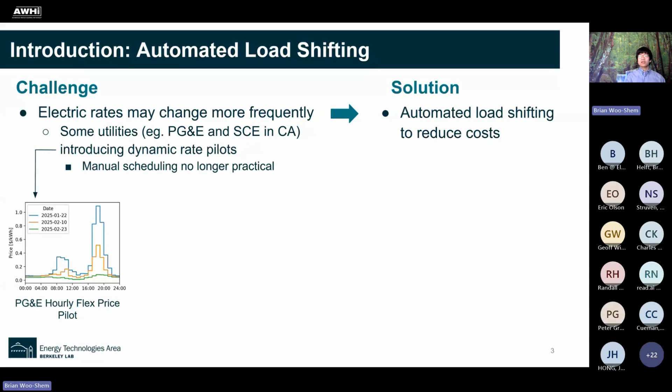In the future, electricity rates may become more dynamic, changing hourly or even more frequently. Some utility companies are introducing hourly flex price pilot programs with prices that vary each day, such as these from PG&E's program. With dynamic pricing, optimizing schedules manually for devices becomes much less practical, and our solution is to have automated load shifting to minimize costs. The goal of our work at Lawrence Berkeley National Lab is to develop an adaptable algorithm that can determine a near optimal schedule from the prices and a few measurable or calculated site parameters.

Highly dynamic pricing reflects the cost to supply electricity at a given time. For part of this field test, we use an example typical day, highly dynamic price for winter and summer, where unfortunately it's the same price every day, but it's still a dynamic price in the sense that it has that kind of shape, shown in the red and blue lines here. We also tested real highly dynamic prices from the PG&E Flex Price pilot program.

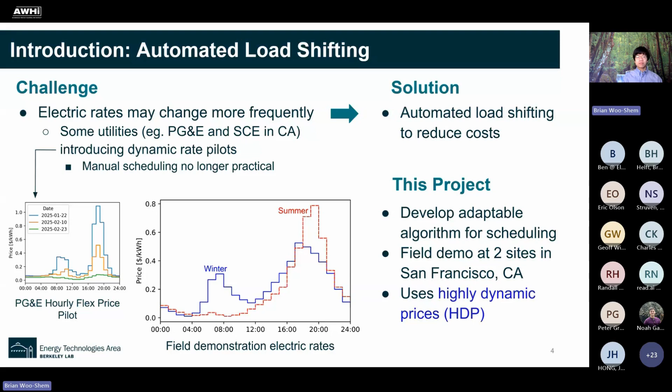So California has set a target to have 7 gigawatts of load flexibility by 2030, with the goal of improving grid reliability and resiliency while making electricity more affordable by reducing the costs during peak load times. This project is funded by the California Energy Commission's Electric Program Investment Charge through CalFlex Hub, a program of studies to identify, evaluate, develop, and demonstrate demand flexibility technologies that are not yet on the market, and help the state meet our 7 gigawatts goal.

The overall CalFlex Hub portfolio includes 90 test sites with projects in HVAC, EV charging, battery energy storage, thermal energy storage, smart thermostats, smart panels, home energy management systems, pool pumps, heat pump water heaters, and heat pumps across single, multifamily, residential, commercial, and campus projects.

The EasyShift algorithm used in this study was initially created under the Stor4Build project, a multi-lab collaboration to develop and deploy thermal energy storage. EasyShift was originally created for hydronic heating systems with air-to-water heat pumps, but was designed to be intuitive and adaptable to any system with energy storage. Since the tanks in central heat pump water heater systems provide thermal storage, we adapted and validated EasyShift for this application.

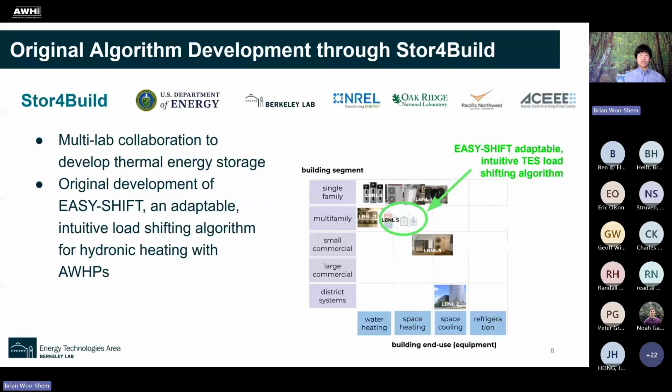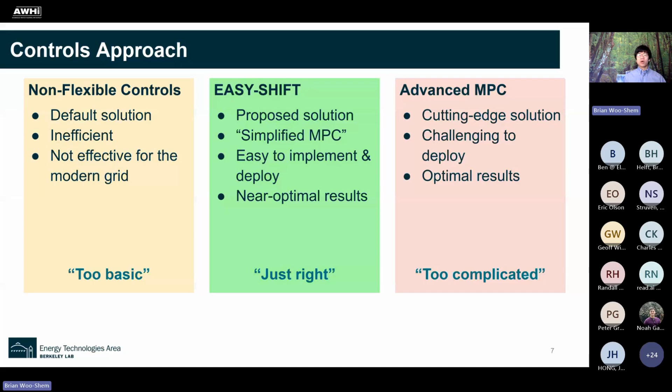The approach for providing load shifting attempts to find the ideal balance between non-flexible controls that are currently present in most devices and are only able to satisfy demand and equipment constraints, and then our most advanced controls, such as model predictive control, that can provide optimal results but have limited adoption because they're just more challenging and expensive to deploy. So this project leverages EasyShift, a simplified MPC, or it could be considered an advanced rule-based algorithm, designed to be simple to deploy while providing near optimal results.

And for this project specifically, as electricity costs have increased, building managers who retrofit buildings to have central heat pump water heaters are not consistently seeing savings on their energy bills. So the goal is to see if we can use the load shifting controls for central heat pump water heaters to help bring those costs down.

The performance of the algorithm was demonstrated through field testing at 2 affordable senior housing sites in San Francisco, California. These are operated by the Tenderloin Neighborhood Development Corporation. They have graciously allowed us to run tests on their equipment and encourage our work to reduce operating costs for the properties, which they can reinvest to better serve their tenants. This presentation will focus on results from the larger site where we have done the most testing.

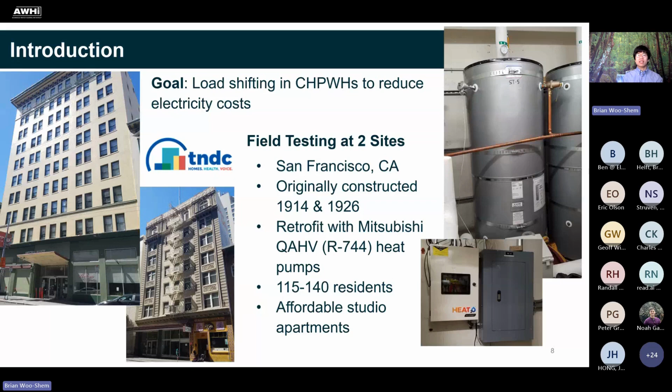Some of you may be familiar with this, but I'll go through a little bit of how these systems work. So the central heat pump water heater systems have 2 heat pumps that provide hot water to a series of tanks. The storage tanks may hold hot or cold water, and we can adjust the state of charge by changing the ratio of hot water and cold water. So the storage tanks feed into the swing tank, which goes to a thermostatic mixing valve and delivers hot water to the occupants. Recirculation then returns back into the swing tank.

When we want to run the system and maximize storage, load up mode activates the heat pumps to increase the amount of stored hot water, and then to avoid using energy during a period, bottom image, the system stages the heat pumps such that only one runs at a time generally, and it allows the amount of hot water to decrease to a minimum level and prevents the swing tank from running.

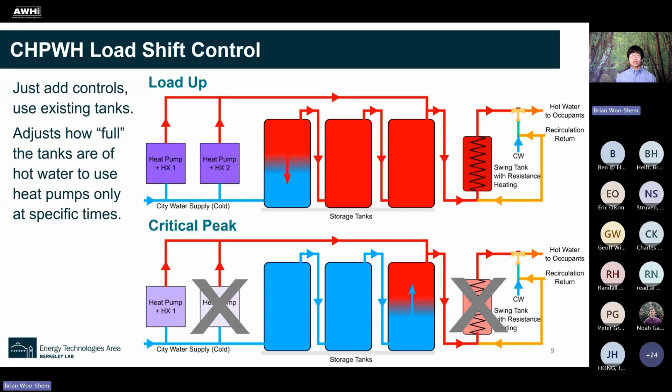Shed is a mild energy saving mode that sets the tanks to a low state of charge, but keeps the heat pumps and swing tank active when needed, which ensures there will be hot water. Normal mode is the typical operation, which has a large deadband for heat pump operation cycles that are many hours long, and load up mode charges the tanks by running the heat pumps as much as possible.

Hey, Brian, quick clarifying question. Jackson asked, what is the total capacity of the tanks in gallons? I'd have to check, but I think it's on the order of 1,000 gallons. I could look that up afterwards. Awesome. Yeah, that sounds right for a central system. Sweet. Thank you.

Of course. So the difference between shed and critical peak modes is that critical peak cannot be used at certain times without sending cold water to the building. So I'll try to explain how that works. So assuming that you have relatively high domestic hot water draw, the swing tank will stay warm because there's higher temperature water flowing in from the heat pumps and storage tanks into the swing tank as water is removed from the recirculation loop. So under these conditions, critical peak can be used and the swing tank can be disabled.

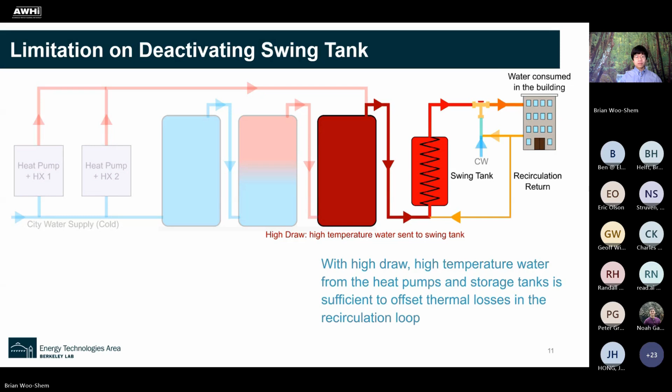However, if your domestic hot water draw is too low, very little water enters the swing tank from the heat pumps and storage tanks, so the same loop of water is just circulating between the swing tank and recirculation loop. And then over time, the thermal loss in the building recirculation will cause this water to cool, and if the swing tank resistance heating is not active, the occupants get cold water.

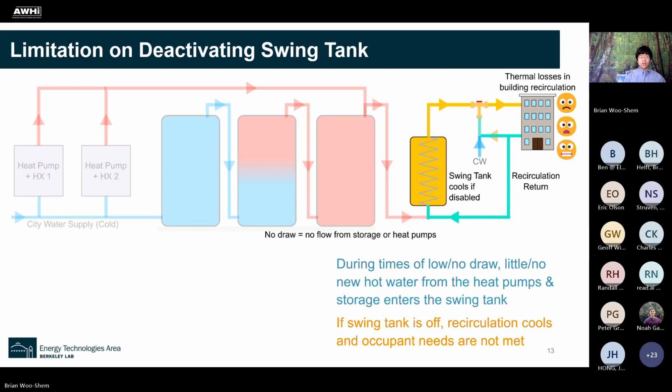When we do not run any load shifting, the system is in normal mode all the time by default. So the large deadband range causes the heat pumps to typically have a single long operating cycle, and the system typically starts the morning with a high state of charge, and then as occupants use hot water, the state of charge decreases. Around early afternoon, the amount of hot water decreases enough to hit the deadband, and the heat pumps activate, and then they stay on through the entire evening peak consumption period and into the night until the tank state of charge is at the upper deadband.

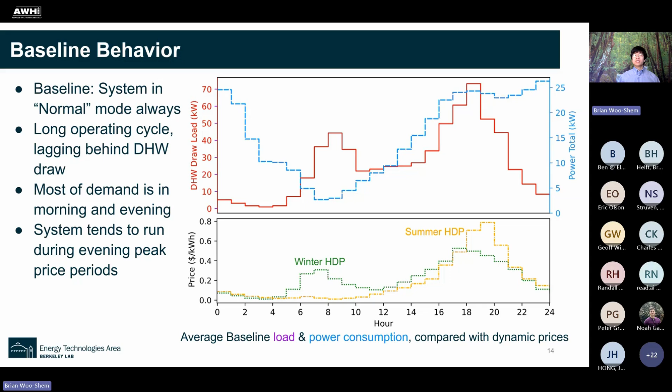So this pattern of lagging behind the domestic hot water draw, especially in an evening peaking building, and running all at once, is really not ideal under California electricity pricing, where the peak demand on the grid and peak prices occur in the late afternoon and evening, which incidentally is when these heat pumps typically end up running the most.

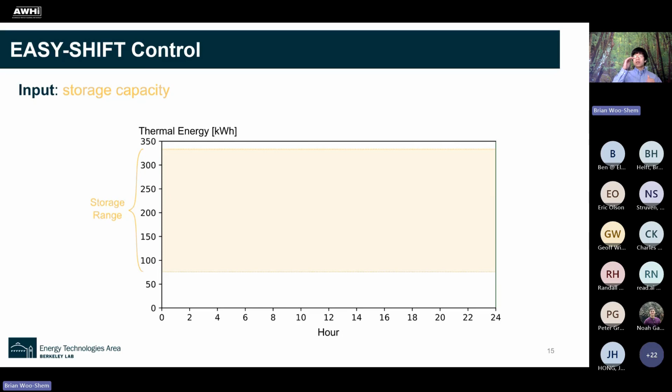So now I will walk through how the EasyShift algorithm that we've developed optimizes the heat pump operation. So we need several inputs. First is storage capacity. That's just a constant system parameter based on tank size and temperature sensor locations. So it's essentially the range of most hot water versus least hot water that we can put in there. Then we look at the heat pump maximum output and domestic hot water load or draw. This is a recent average based on data collected at the site and then converted to kilowatt hours.

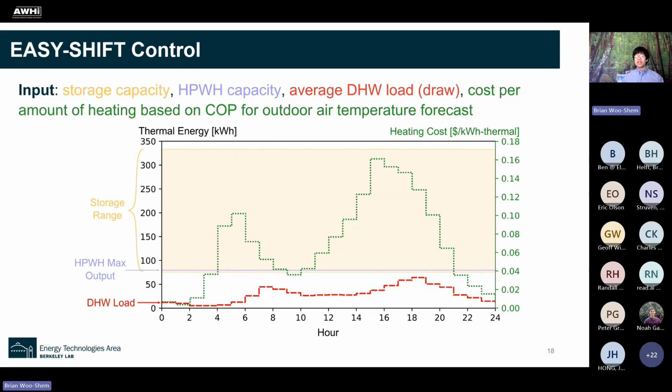We then need the hourly electricity prices at the site and weather forecasts for outdoor air temperature, which is used to predict coefficient of performance based either on manufacturer specifications or, when possible, a model based on the historical data from the site. So these two items are combined to get the cost to heat the water during each hour. So the green line represents the cost to produce 1 kilowatt hour of heat or thermal energy in a given hour.

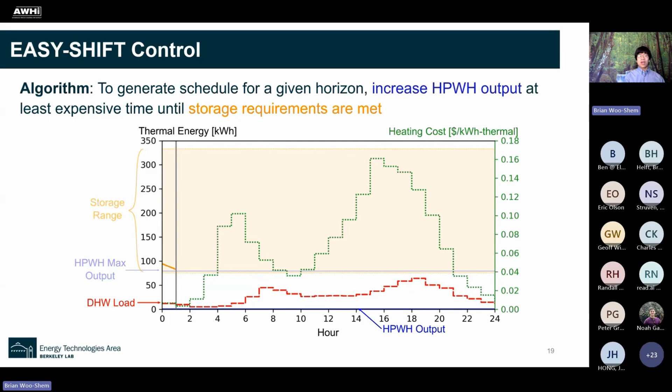So to create a schedule for the next 24 hours, EasyShift looks forward through each hour, increasing the heat pump water heater operation at the least expensive remaining time until the target thermal energy storage is within the allowable ranges, both the maximum and minimum, for the entire period, and it satisfies the hot water load for the entire time. Note, I'll emphasize that this image is generating a schedule for a given horizon. This is still happening all at hour 0. It is looking forward based on these predictions to create the schedule. And then at the end, this is the schedule that it produces.

A few things to notice, in hours 10 through 12 here, it's obeying the maximum storage limit by only limiting how much it can run. And then in hours 19 through 23, it avoids running out of hot water by using just the minimum energy needed to satisfy the load, but does not use any more since it determines it is not cost effective to run during that time unless it has to.

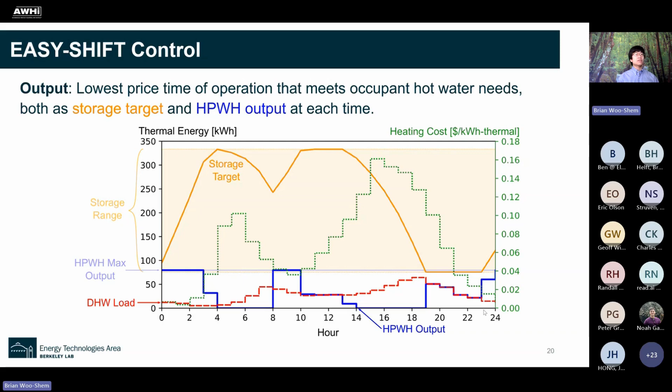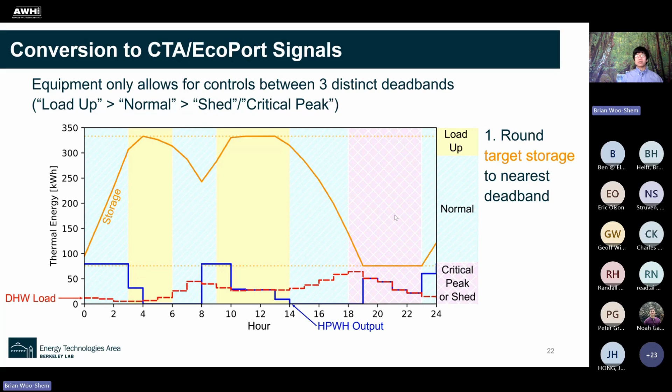So then once we have this target storage level and heat pump water heater operation, we need to convert that to EcoPort signals, at least for this field test. So first we look at the range of thermal energy to be expected for each mode, and it's essentially which deadband range corresponds to that amount of thermal energy storage. And we can simply assign each hour to the mode that matches the target storage for the end of that hour, because that's what we want it to do during that hour. So we want to set it to that mode.

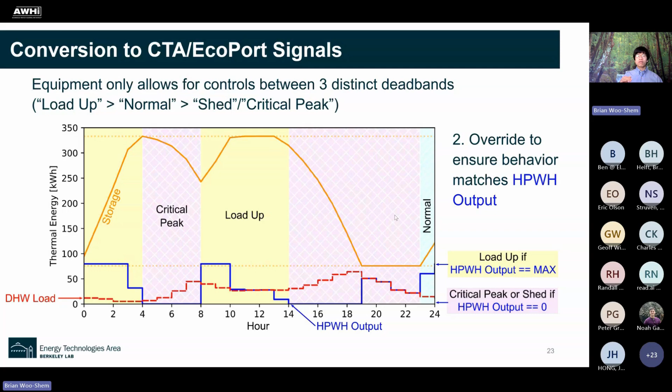Then we adjust to make sure that it matches the expected heat pump behavior, because when the heat pump is operating at max capacity, we want to force the mode to load up regardless of what state of charge it should be in. And then if the heat pump is supposed to be off, the mode should be either critical peak or shed.

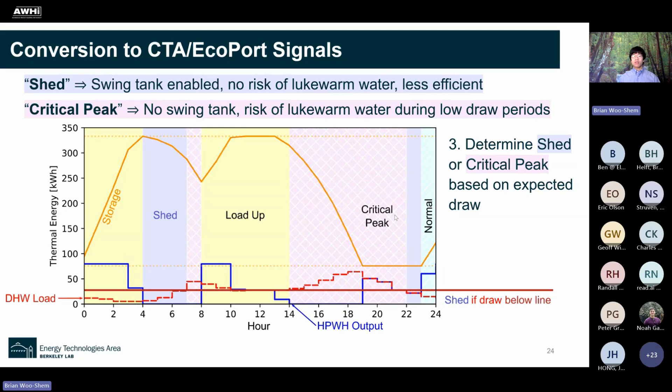Next, to determine whether to use shed or critical peak, we look at the expected draw. And previous testing found that when the draw is relatively low, recirculation losses dominate and the swing tank needs to operate where the temperature drops below set point, as I kind of showed in a diagram before. And so the dark red line indicates the threshold for high versus low draw and was determined experimentally for the site. We use shed mode, which is less efficient, but allows for the swing tank usage to prevent issues when the draw is below that line. And then critical peak, which is more efficient when the draw is high.

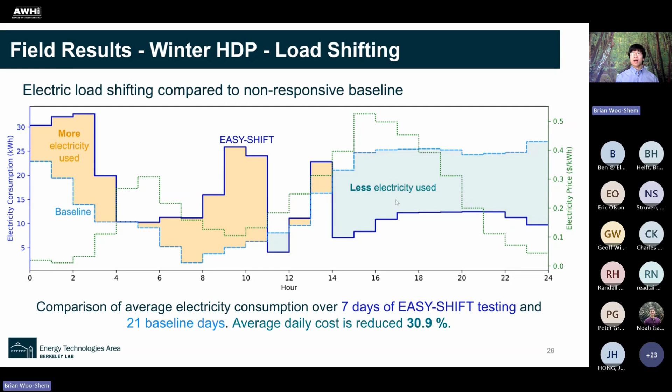And we see that under this winter pricing scenario, the total draw was similar, and EASY-SHIFT reduced the cost by about 31%. It increased the system COP slightly, and it maintained the proper set point nearly all of the time. The temperature dropped very briefly during low draw periods under critical peak in the first couple of days of the test, which is why this reliability is not 100%. So we increased the minimum draw threshold even higher between the critical peak and shed modes to prevent issues. And then we had perfect reliability after that point.

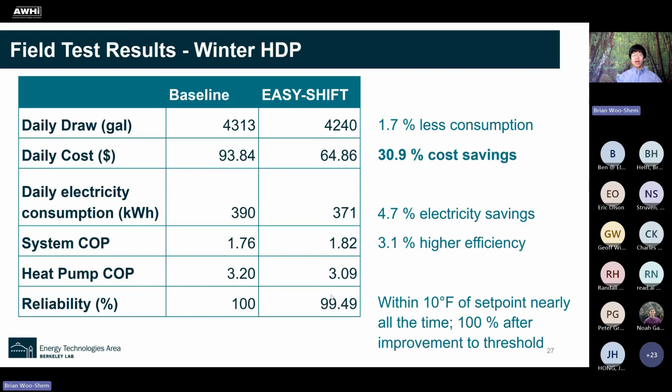We then tested a summer highly dynamic price, which is characterized by a single large peak price in the late afternoon and evening. So the algorithm responds by using load up starting at the low price in the relatively early morning, and then continuing to keep the state at a high state of charge through the afternoon. And then it uses the storage to avoid the highest prices and keeps the tank at the lower state of charge through the night.

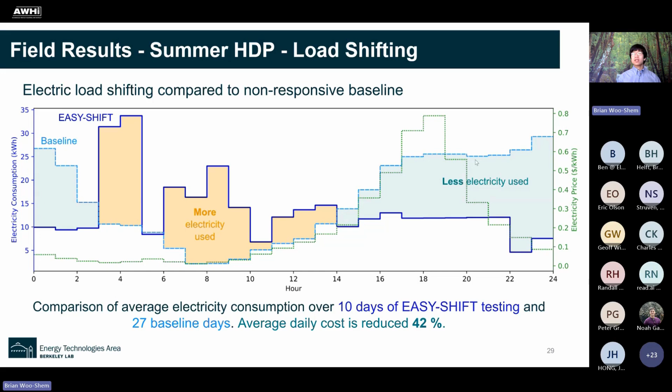And this plot here, similar to the other one, compares the average electricity consumption between EASY-SHIFT and the baseline weeks, but for the summer pricing profile. And again, yellow-orange indicates more energy used, and teal indicates less electricity used. Overall, this test reduced the cost by 42% and increased the efficiency slightly by running the heat pumps during the late morning and early afternoon when heat pump COP is higher. We're seeing good reliability here as well.

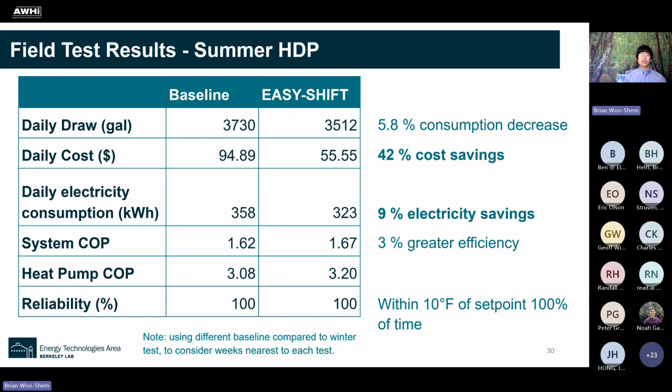And then PG&E hourly flex pricing is a pilot program that customers can enroll in with a variable rate based on wholesale prices forecasted up to a week ahead and finalized the day ahead. So the larger plot here shows a sample of different days and the average price for the field sites since the hourly flex pricing for this location became available on January 2nd of this year.

Note that prices are higher in the summer and fall, and we unfortunately do not have data for those yet, and prices can vary by much more at other locations, but since the field sites are in an area with a relatively stable grid connection, they have not shown extreme high price periods that we have seen at a few other locations. So we've been going through the pricing at a bunch of different locations just to kind of look at what we see to get a sense of what the potential is, and these sites have a relatively stable price profile. Some other sites we saw have pretty large variation occasionally.

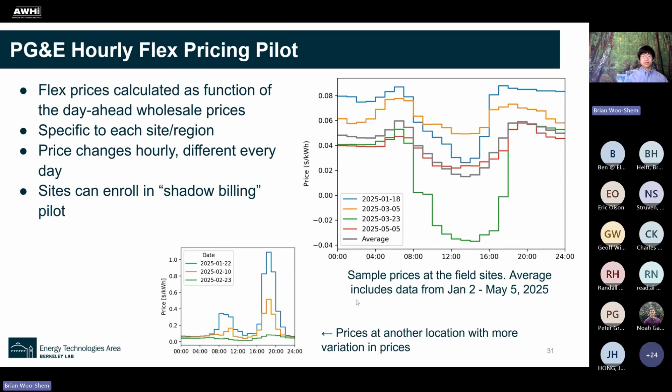So prices at the site for the days that we tested are shown here. And in the spring, electricity costs are generally low, especially low between 10 a.m. and 4 p.m. when solar production is plentiful. And the morning and evening peaks are less pronounced because heating and cooling demands are low during the relatively temperate weather. Instead, we just see generally elevated cost overnight relative to midday.

So for the most part, the EASY-SHIFT algorithm is able to take advantage of those extremely low price periods or even free or negative price electricity periods during the late morning and early afternoon. And under this pricing, the EASY-SHIFT control showed 36% cost savings, primarily from shifting load away from peak price times, but also by improving the efficiency by about 9%. This is largely because the prices were so drastically lower midday, it caused most of the operation to occur when outdoor air temperatures were higher, and thus the coefficient of performance is higher.

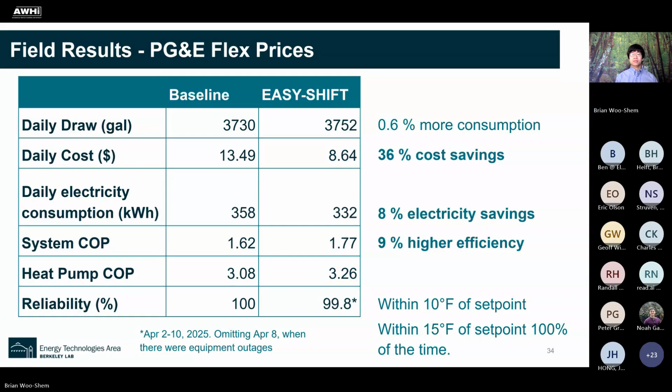We encountered some challenges with the system, especially when trying to run load shifting. So if the system remains in load up when the tanks are already at the maximum state of charge, sometimes the temperature of the inlet water to the heat pumps increases due to warm water being pushed out of the storage tanks. This decreases efficiency since R744 heat pumps perform best with large temperature differences.

One possible explanation suggested by a subject matter expert is that the storage tanks have both series and parallel connections, with several blocks of 3 tanks then connected in series. So if the last 3 tanks in the system are not balanced perfectly, one of them may be pushing hot water through the heat pumps while the others will still be cold. However, this hypothesis cannot be verified because it's prohibitively expensive to install additional temperature sensors in all of the tanks to identify what's going on with the stratification.

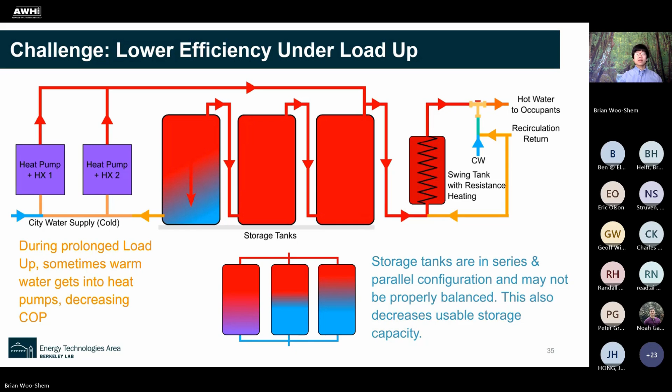Another challenge is the system configuration allows for reducing, but not eliminating load during the peak price periods. The tanks are large enough to provide a few hours of hot water during the daytime hours, but are not large enough to avoid operation the entire high price periods in this test. And also the system is configured such that even after a long load up period, when switching to critical peak, one heat pump will usually remain running the entire time if there's even a moderate level of draw during that time.

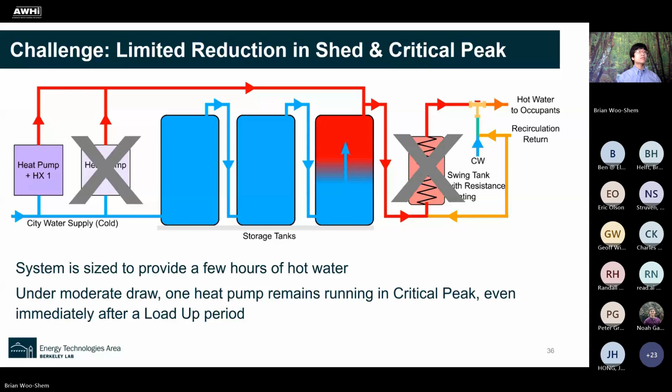This test was performed using open loop controls, which pre-schedule a few days ahead using forecasts for weather and prices. This is really a workaround for equipment without real-time communication, and is less efficient because it cannot adapt to changing conditions. This forces us to schedule very conservatively for the most difficult scenario to ensure that hot water demands are always met, and it reduces opportunities for savings. You may also have noticed that there were a couple cases where we did not have hot water demands met, and that was because we were trying to figure out the thresholds ahead of time for this open loop.

So ideally, we would use a closed loop receding horizon that updates each time step based on current measurements. This requires frequent communication to and from the heat pump water heater, or running EASY-SHIFT locally on the system with prices and weather sent regularly. This is more efficient because it can adjust to the current demand and performance, and it can have more aggressive load shifting on days when draw and temperature conditions are more favorable to load shifting.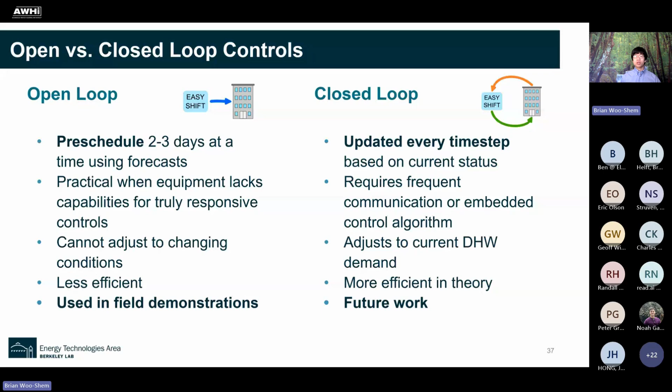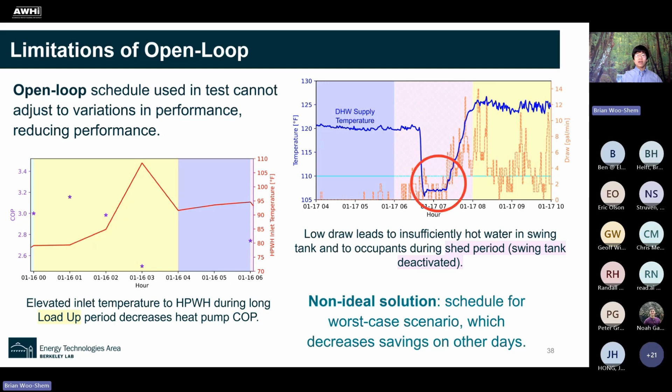Finally, as you may have experienced in daily life, weather forecasts are really less reliable when further into the future. And again, the solution used in these tests was to schedule extremely cautiously to ensure that hot water demands were met on the most challenging days, which decreases savings at other times. For the flex price tests, the price forecasts are also imperfect. This reduces savings as the schedule is optimized around the forecasts, but the site would pay the actual rate. So a closed loop control in this case, again, would eliminate the issue.

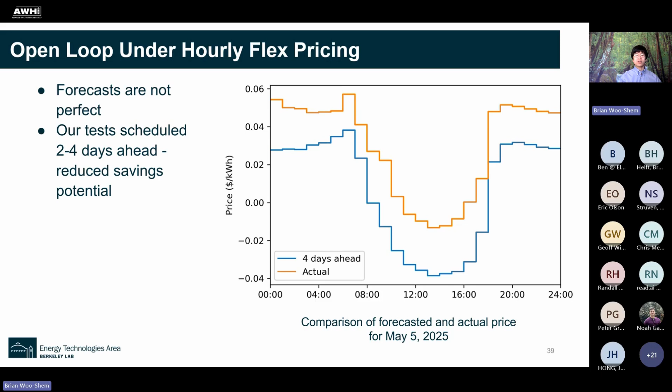3 major areas for our future work are first, implementing closed loop controls, which would integrate directly with the manufacturer's controls or through frequent communication with an external controller. We'd also explore other communication protocols such as OpenADR3 or others that are being developed that could be used for this purpose. Second is performing long-term field demonstrations to optimize around available rates such as the dynamic pricing pilot programs and

measure ideally the effectiveness of these over an entire range of price profiles that would occur for, say, an entire calendar year, whereas it's hard to make a definitive statement on whether they save costs under just over a week of testing. We could also adapt the algorithm to reduce demand charges under current time of use rates.

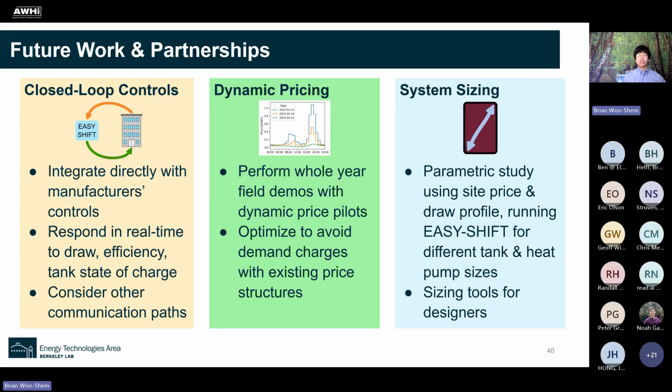And third, we'd like to apply EasyShift to take a site's electric rates and draw profile, and then be used as a sizing tool to compare the first cost of different equipment sizes and determine the optimal tank and heat pump size to minimize the lifetime cost. For example, it could determine if adding more storage to increase the shed duration at these field sites would be economically viable or not.

Overall, our work demonstrates the ability to schedule and optimize central heat pump water heater operation automatically. In field tests, we were able to reduce operating costs by 31 to 42%, even with a non-ideal open-loop control setup on imperfect field sites. The EasyShift algorithm also has potential as a sizing tool. It provides automated load shifting with relatively easy commissioning and setup, and these features lead to achievable cost savings for building operators and grid reliability benefits for utility companies.

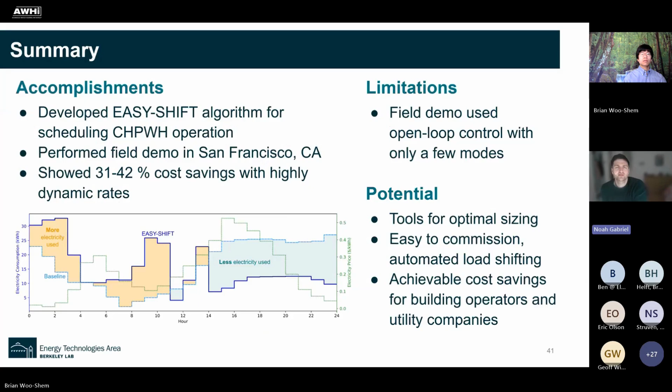Yes. Let me show this slide again. So we would ideally like to do that, but we do not have individual control over the components. We only have these modes, which are designed, rightly so, around energy efficiency as much as possible, because negative pricing is kind of an unusual case to see, and we were able to test during that just to see what it does. So we tweaked the algorithm a little bit to at least use shed mode instead of critical peak if the price is negative or zero, and try to use load up as much as possible, but it cannot, especially during times of higher draw.

Generally the system's internal controls will automatically avoid running the swing tank. So unfortunately, we did not have a way to induce swing tank operation intentionally, even though we thought about it and wanted to do that.

Understood, great answer. Peter? Yeah, I just wanted to add a quick addition to Brian's great response. We've talked a little with manufacturers about integrating this control algorithm directly into their products. If we were to go that route with a manufacturing partner, presumably we'd be able to directly control the resistance elements and heat pumps, so we could make it happen at that time.

Sweet, and did manufacturers seem interested in the collaboration? We've only talked to one, but sample size of 100% of manufacturers are interested.

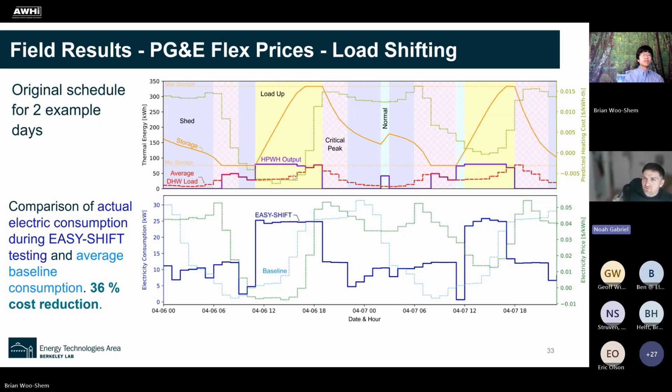Awesome, seemed like great controls and relatively straightforward to explain too, so that's great. Another question from Daniel: what is the rationale for the quick succession of load up to normal to shed events in the summer pricing scenario when prices are low throughout?

Yeah, that's a good question, one we spent some time looking at. The algorithm is trying to minimize costs, and it doesn't differentiate between a 0.01 cent cost saving versus a many-dollar cost saving—it just looks at anything that saves costs. In this case, if you look carefully, the price in hour 3 is the lowest, hour 4 is second lowest, and hour 5 is a little higher than those two. So it's purposely trying to do a shed during hour 5 to avoid operation then.

And that's fascinating, the succession between those. So the algorithm just sees this as slightly more expensive, slightly less expensive, and decides let's avoid the more expensive time.

Yeah, interesting. Are you going to adjust that at all for relative pricing, since even that slight bump in hour 5 is so much less than the critical peak around hours 16 through 21 roughly?

Well, that would be something to consider, but what's going on here is the algorithm is trying to charge the tanks as much as possible during the lowest cost hours. The lowest cost hours of the day, once you factor in the cost to heat the water, are hour 3, 6, 7, 8, and then the next best is 9—I know this because I was staring at it. For the other hours, say 10 to 16, it's already hit maximum storage, so it's just keeping the tanks at that level by staying in load up, in order to maintain that storage, because its main priority is to avoid the big peak between hours 16 through 20.

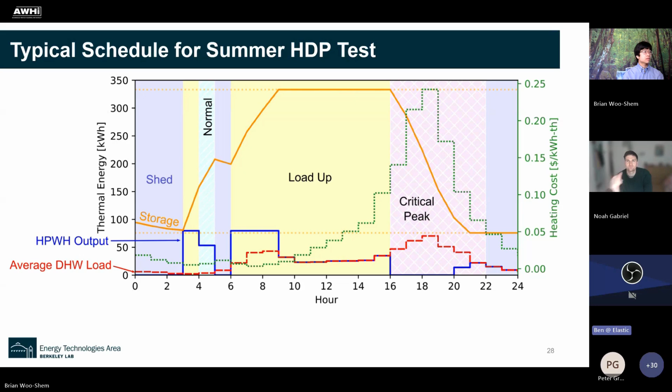You were talking about wanting to, as you progress development of the EasyShift algorithm, directly integrate with more bits of hardware, with potentially more data around the site, to do this load shift even better. This is something I'd love to chat with you about after, because we make an OEM-agnostic load controller that I think might be useful for your tests. I'd love to make some available for you.

I see some chat messages about questions about slides showing up or not showing up. Let me try showing, I was seeing the graphics. I think the animation just might not have been happening, but it was no big deal. It was still pretty clear what was going on. Might have just been a Teams issue.

Okay, yeah, other questions, comments? We'll give folks another sec here if there's any thoughts percolating. But yeah, super impressive savings from the algorithm and everything. Just fingers crossed that these highly dynamic prices will be implemented before too long on the grid, so we can use this and have these real life savings, right?